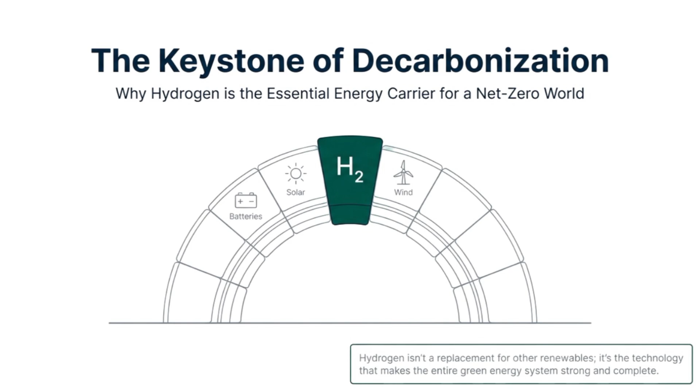Welcome to Module 1, Lesson 1 of our comprehensive course, Hydrogen Fuel Cell and Energy System. I am pleased to guide you through this introductory lesson on hydrogen as an energy carrier. This entire module focuses on the fundamentals of hydrogen and energy systems.

By the end of this lesson, you will achieve two main objectives. First, you will understand why hydrogen is called the fuel of the future. Second, you will learn about the essential physical and chemical properties. This fundamental lesson is designed to take approximately 2 hours and your understanding will be evaluated through a short quiz.

Let's begin by understanding why the world is rapidly moving towards hydrogen-based energy systems. Hydrogen is considered the fuel of the future for a very simple reason. When we use hydrogen as a fuel, the only byproduct is pure water. Because it is carbon-free, hydrogen power systems play a major role in reducing emissions from vehicles, industry and power generation.

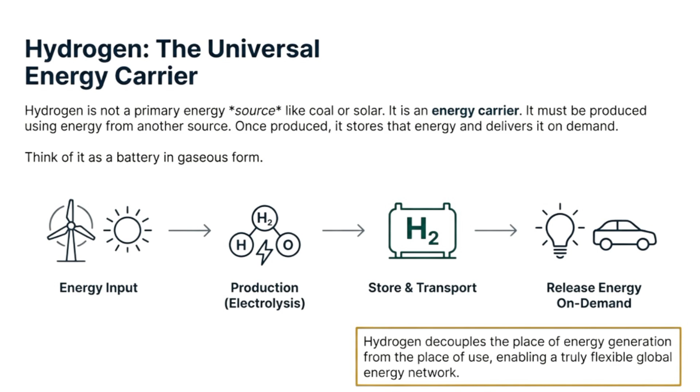For example, solar electricity generated during the day can produce hydrogen through electrolysis. That hydrogen can then be stored and used at night or transported to another location. That's why we say hydrogen decouples the place of generation from the place of use.

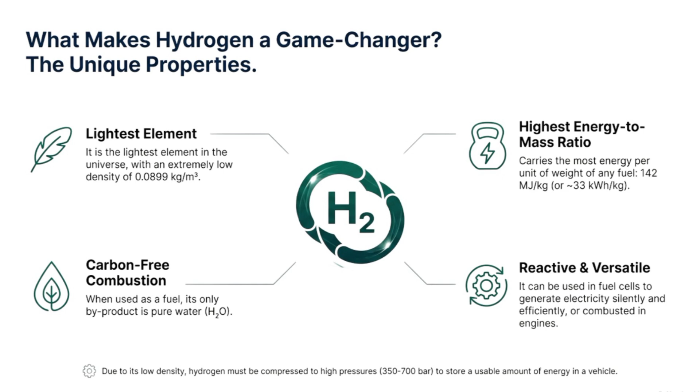Hydrogen has some extremely unique properties. It is the lightest element in the universe and has the highest energy per kilogram compared to any fossil fuel. This high energy density is the greatest advantage of hydrogen. Petrol has around 12 kilowatt hours of energy per kilogram. In contrast, hydrogen contains nearly 33 kilowatt hours per kilogram, close to 3 times more than petrol. This means hydrogen can store a large amount of energy while remaining extremely lightweight.

Let's look at the characteristics that make hydrogen both useful and challenging. Physically, hydrogen is a colorless, odorless gas at standard conditions. Its density is extremely low, meaning it rises upward very quickly when leaked. Because of this low density, hydrogen requires compression, typically 350 bar for medium range or 700 bar for long range, to store usable energy.

The next property is a chemical property. Hydrogen's formula is H2 and it is highly reactive. It burns with a pale blue flame and produces only water after combustion.

Let's compare hydrogen with other major fuels. Compared to petrol and diesel, hydrogen has almost 3 times more energy per kilogram. And while petrol produces CO2 and pollutants, hydrogen produces only pure water. For convenience, both petrol and hydrogen refueling times are similar, around 3 to 5 minutes. The primary advantage of hydrogen is zero tailpipe emissions.

Compared to CNG, both are gases, but hydrogen is lighter and needs higher pressure for storage, operating at 350 and 700 bar compared to CNG's 200 to 250 bar. Hydrogen also provides higher energy per kilogram and burns cleaner.

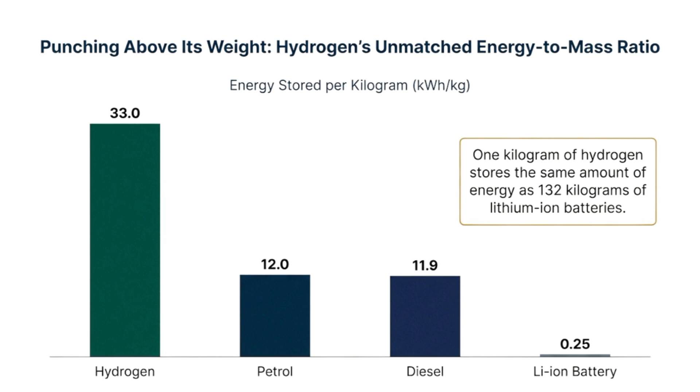The comparison with electric batteries is where hydrogen's benefits for heavy-duty applications truly stand out. Battery packs store energy chemically but are extremely heavy. To store 30 kilowatt hours, a battery may weigh between 200 to 300 kilograms.

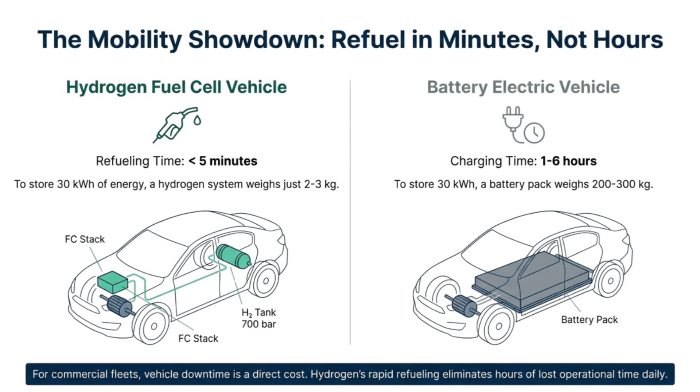Hydrogen, in contrast, can store the same energy in just 2 to 3 kilograms. This is because a hydrogen fuel cell system is lighter than batteries, which is why hydrogen is preferred in heavy weight applications like buses, trucks, defense vehicles and aviation.

For fleet operation, charging time is a critical factor. Hydrogen refueling takes less than 5 to 10 minutes, similar to liquid fuels. EV battery charging, however, can require 1 to 6 hours or even 5 to 7 hours for normal charging, creating costly downtime. Hydrogen also requires no recycling step and leaves no residue, achieving infinite cycle efficiency.

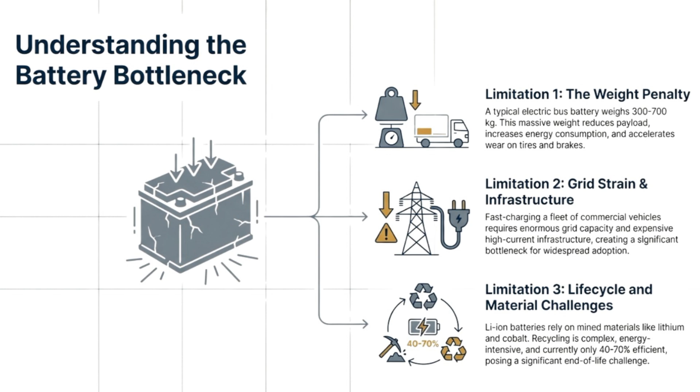In contrast, lithium-ion batteries contain elements like lithium, cobalt, nickel, and recycling them currently has an efficiency between 40% to 70%. It is important to note that hydrogen is not replacing batteries entirely, but it plays a critical role where batteries are not suitable, such as for long haul trucks, intercity buses, and mining vehicles that require long range and fast refueling.

Role in a net zero transformation. Hydrogen plays a critical role in the global move towards net zero carbon goals. It eliminates CO2 emissions in mobility, as a fuel cell vehicle emits only water vapor. Second point, it significantly reduces the industrial carbon footprint in heavy sectors like cement, steel, fertilizer, and refineries by

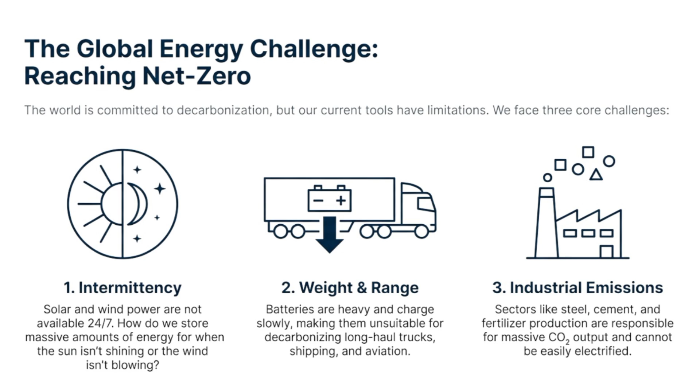replacing fossil fuels. Third point, hydrogen enables the storage of renewable electricity, allowing fluctuating solar and wind energy to be stored and used whenever it is needed. Fourth, it also makes aviation and shipping cleaner, sectors that cannot run efficiently on a battery due to weight limitations. These applications are already underway with hydrogen buses in India, hydrogen trains in Germany, and hydrogen-based steel manufacturing taking place in Sweden and Germany.

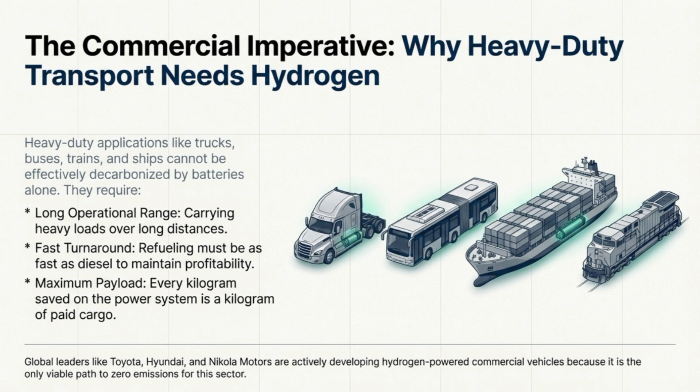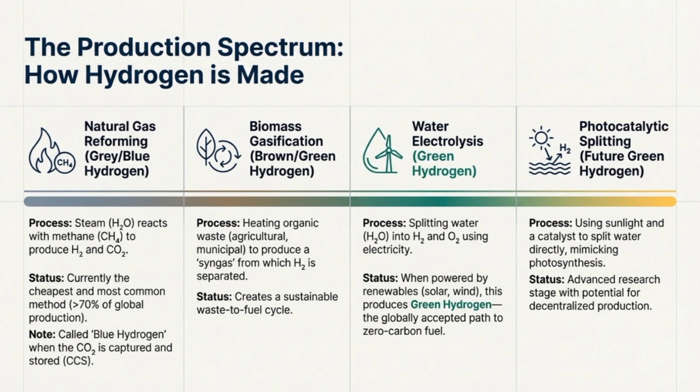Photocatalytic water splitting. This is an advanced research method that aims to use sunlight directly with a special catalyst to break water molecules, mimicking photosynthesis. This technology is still in the laboratory. Hydrogen production is a spectrum of technology evolving rapidly from conventional reforming to smart, renewable-powered innovation.

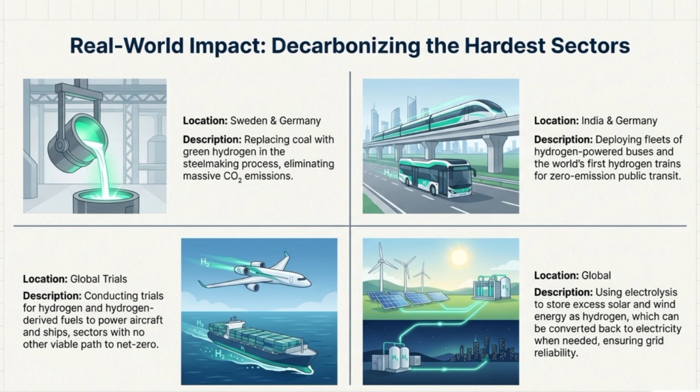To summarize this introductory lesson, hydrogen is a carrier of green energy. It has unique physical and chemical characteristics, being the lightest element with the highest energy density per kilogram. Compared to petrol, CNG, and batteries, it provides extreme energy density with zero emissions. This makes hydrogen the backbone of green mobility, clean industry, and carbon neutral energy systems.

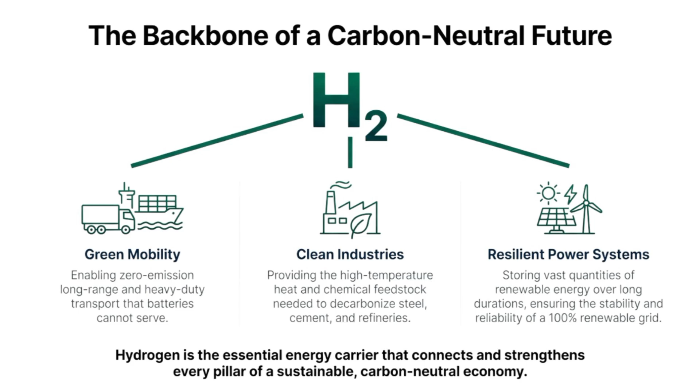This understanding forms the foundation from which we will proceed deeper into fuel cell systems, hydrogen manufacturing, storage, vehicle integration, and advanced engineering mechanisms in upcoming lessons. Before we conclude, your practical assignment for this lesson is to compare hydrogen versus petrol, diesel versus EV battery in a table format.